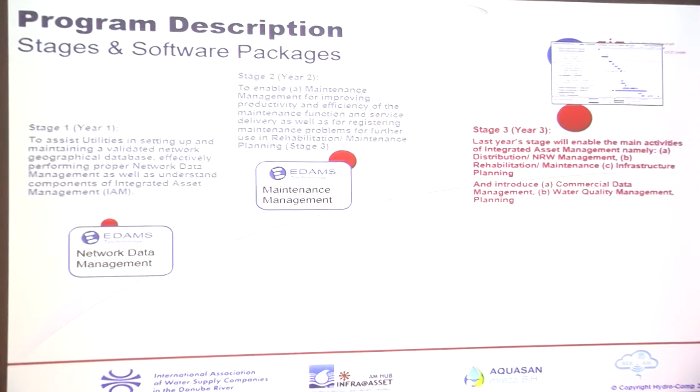Stage 3 is a combination of basically 3 activities: non-revenue management, distribution non-revenue management, rehabilitation maintenance, and infrastructure planning. Shortly, I will explain what these 3 things are.

Of course, each one of these items is supported by EDAMS modules. So there is a specific module addressing non-revenue water, and addressing asset management and distribution management.

What is distribution management? As you see in the slide, we want to ensure proper service delivery, to operate and control our pumping costs, and to localize and quantify as much as we can system losses.

Now, as you can see, there are preconditions. To get there, you need to have a computerized billing system, which everybody has. You need to have a good asset registry, and you need to have a distribution network reasonably zoned with bulk meters. So we're going back to zoning now.

I don't know which of you were in the advanced training. You remember we touched the subject of zoning. When we touched the subject of zoning, a lot of people didn't exactly follow what we were doing on the zoning side. We understand, the concept is not that simple. It's deceptively simple, it's not. There is confusion about zoning. Different people mean different things. People do DMA zones and they think they do zoning.

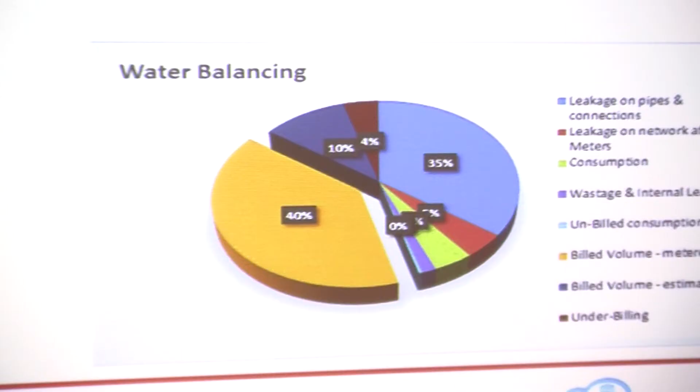They're not. DMA zoning is artificial zoning we create to control losses, but it's not our true zoning. Our true zoning, and how the system behaves, is controlled by pressures, by PRVs, by reservoirs. That doesn't mean it coincides with our DMA zoning. It might not, and that creates a lot of confusion.

Because you have consultants coming in and telling you, break the system, yes fine, put bulk meter here, put bulk meter there, put 20 bulk meters. In the meantime, they're destroying the network, they're destroying the pressures. And then one brings the other. They say, oh you know, there is no pressure here, or there's too much pressure here, put another PRV. So you start creating a very high complexity within the system because the whole process was wrong.

Because a simple concept, a theoretical simple concept, is not understood. So we have to go back to basics.

We have an excellent tool, the Zone Manager. Excellent tool. That tool, what it does, ignores what you have done. Ignores completely what you have done. It tries by itself, unsuccessfully sometimes, but it tries by itself to recreate your zoning. It says, I don't care what you've done, I don't care what you think, I'll tell you what your zoning is.

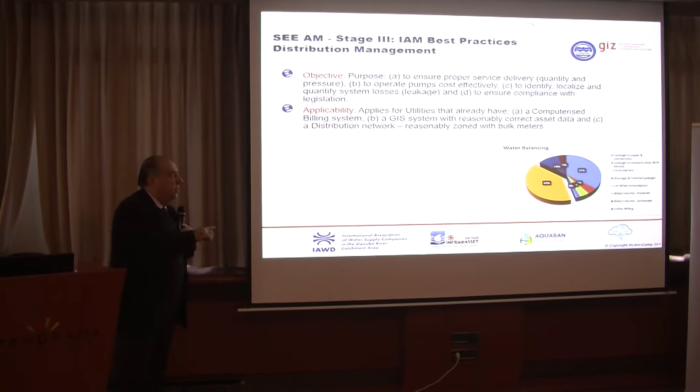And if your data are correct, it will recreate by itself your zoning, and that is your true zoning. Your true DMAs, your true pressure zones. We're going to come back to it. As I said, it sounds simple, it's not that simple. But from our understanding, it has everything to do with distribution management.

Okay, so what are we addressing here? We have a very nice infrastructure that we call non-revenue auditing and balancing. It's a separate subsystem with a specific purpose to manage DMAs. If we have built our asset registry properly, now we're putting in the infrastructure to actually capture and control our DMAs.

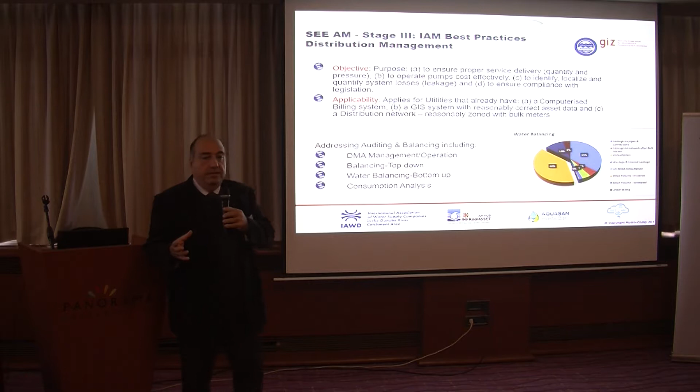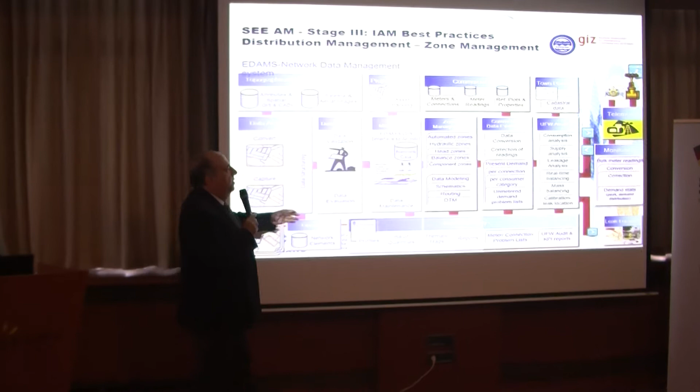But before we get there, as you can see, these are the modules that come with it. There is a separate module for zone management, for commercial data evaluation, and for unaccounted for water analysis. I will say a few things about commercial data evaluation because this is a more complicated thing.

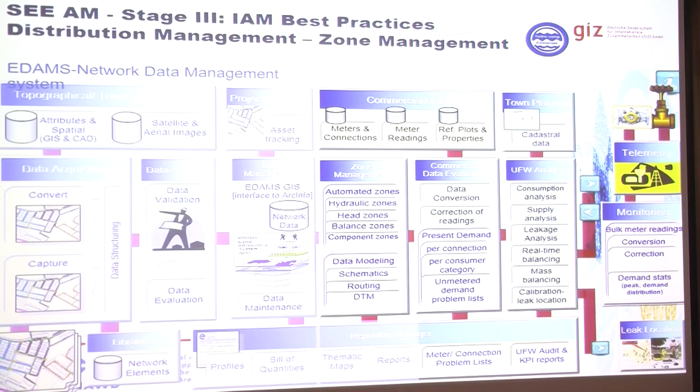But the unaccounted for analysis module on non-revenue is the heart of the system. Part of it is what we call supply analysis and zoning. Zoning, some of you have seen. Your whole system must be regenerated by the system. To start discussing distribution management, we must have the same picture in the system as the one you have on your walls. We must be able to see and understand the zoning the way you understand it. If we have a disagreement, there is a problem.

Either what is in the system is wrong and you are right, or you are wrong and the system is right. Can't be both.

So the starting point is the zoning. At the beginning of stage 3, we must all have the same understanding that these are your zones. If we don't, there is a problem.

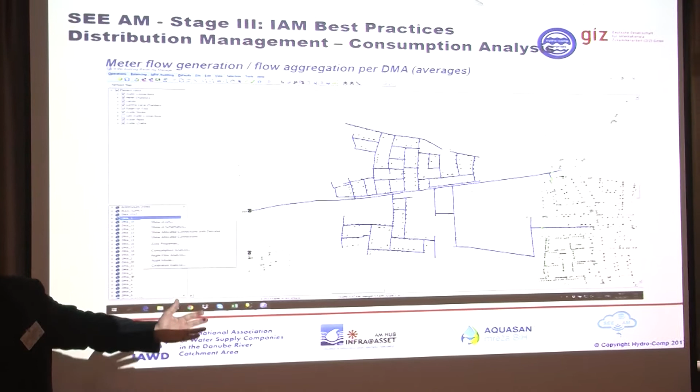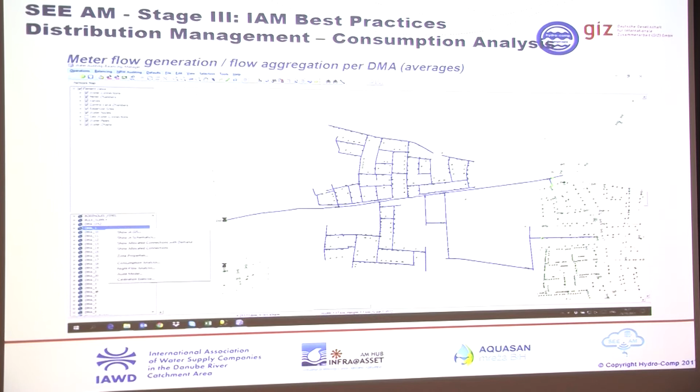Then we can relate, if we have the layer with your connections and the demands from your billing, we can relate for each of these DMA zones your connections, your consumers, to the actual network. The system will do that automatically, and it will aggregate the demands for the whole zone.

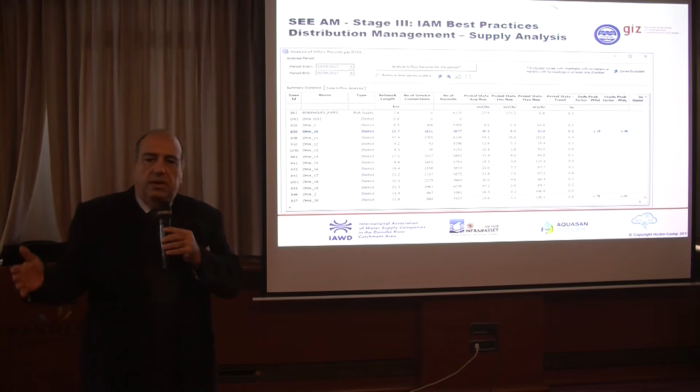But also will do something else. We'll do what we call supply analysis. Now for utilities that have a few bulk meters, that's not a big issue. If you have 2, 3 bulk meters, it's fine, you manage them.

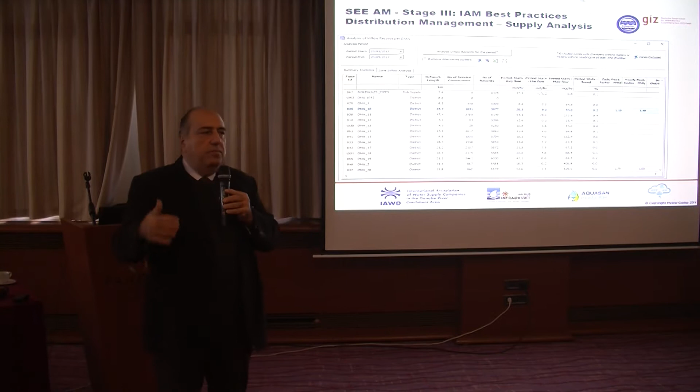But the problem is, with time, you start putting in the system more and more bulk meters. The 3 become 10, they become 15, become 20. And how do you manage these bulk meters? You say, I'll put telemetry. Excellent. So now you have 20 bulk meters and a very nice telemetry system.

And now you have all these signals and records coming from the telemetry with interruptions, with readings wrong, with wrong flows, with spikes. How do you use this data? How do you get from the telemetry readings to balance your DMA zone?

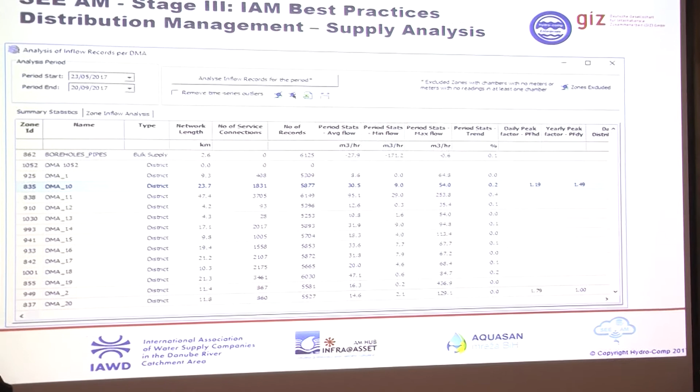That is the question addressed by a module called supply analysis. We also didn't know. We found out from real practice. We went again and again to utilities and they told us, look, we have this problem. We spend a lot of money putting in telemetry, but we're not getting what we want out of it. It's not what we're supposed to get.

How do we use that data? How do we relate this data from the telemetry to our DMA zones? So that infrastructure is in, and the process is called supply analysis.

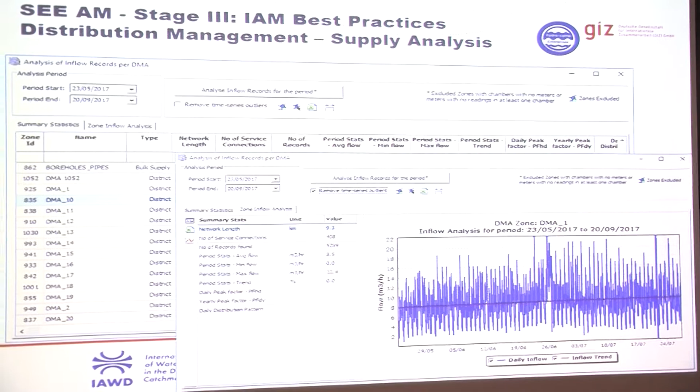So we bring the data in from the telemetry, we link to the telemetry. Since it was asked, we're going to explain how you're going to link in the telemetry. If you have a reasonably recent telemetry system that we can actually link to, and it's not ancient, working in a proprietary database, we should be able to link. It's easy, it's not so difficult. It should be a straight database.

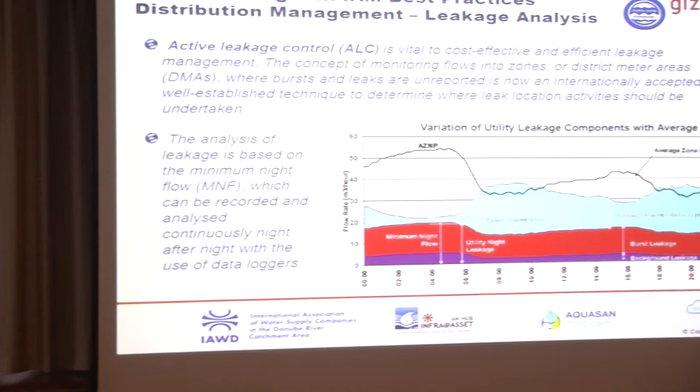So we bring in, we establish a link, and we start bringing in these telemetry records and filter them and analyze them. And what do we do? Before I go here, let me go up again. We link them to the bulk meters.

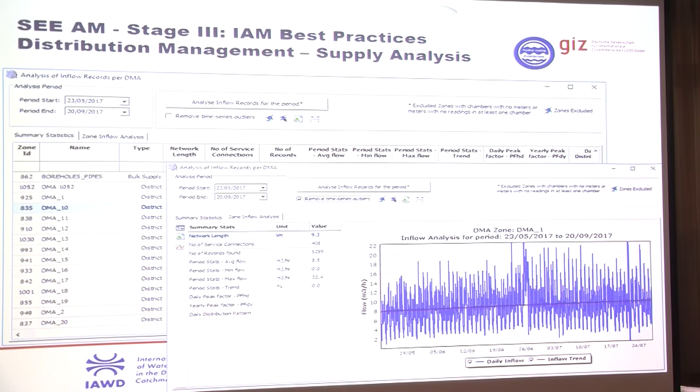So we take each telemetry record, we link them to the bulk meters, and we group them, because our zone manager knows which bulk meters belong to which zone. So it doesn't matter if you have 3 bulk meters in one DMA zone, the readings will be grouped automatically. That's called supply analysis, because where I want to end up is with one inflow going into the zone.

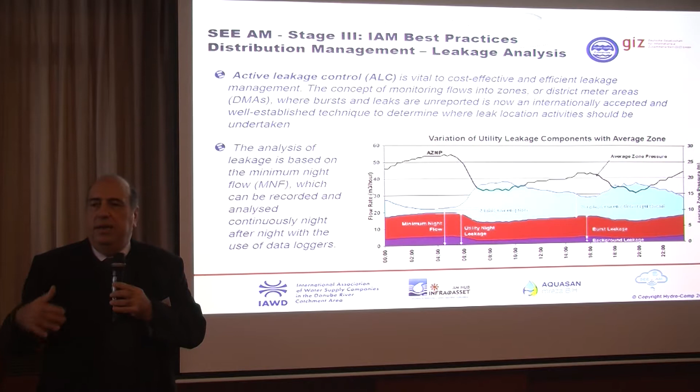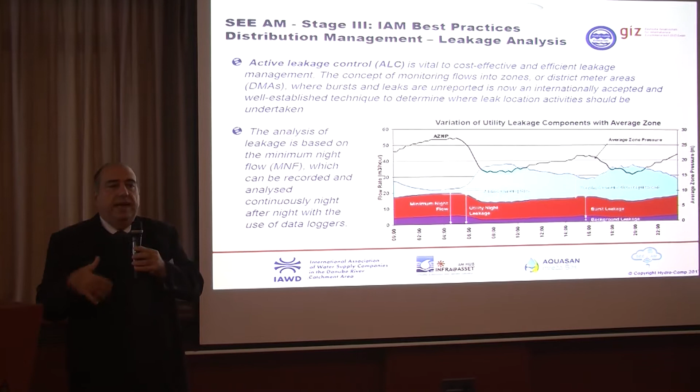What is our final objective? I'm not going to go into the theory now, but what is our final objective? Everything we do follows IWA practices. The system has fully incorporated IWA leakage control practices. IWA discusses and propagates active leakage control. We want to be able to react as soon as possible to leakage incidents and prioritize the zones and prioritize the problems.

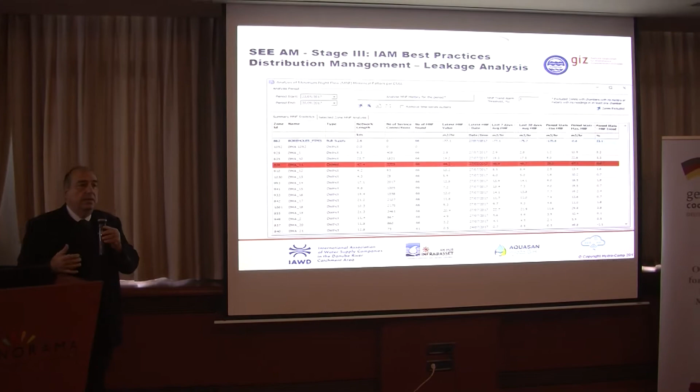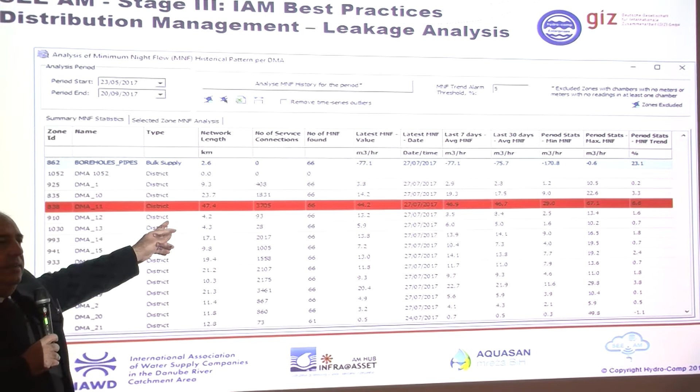So the system, once it's set up, automates the process. Here are your DMAs. It picks up and recreates the night flows. It generates the actual night flow for every zone and prioritizes them. You can even have alarms that tell you something is going wrong in DMA 11. So automatically, every day it can give you alarms showing which zones have problems.

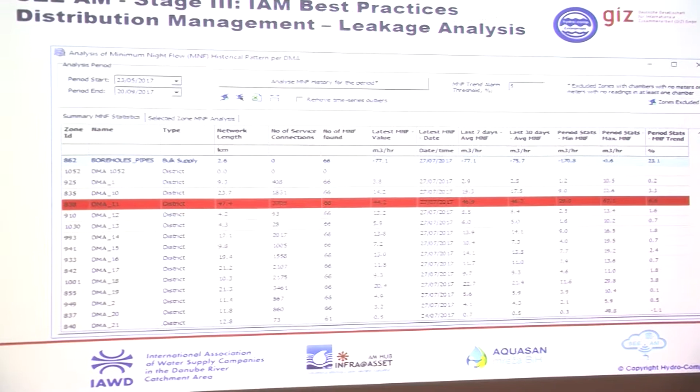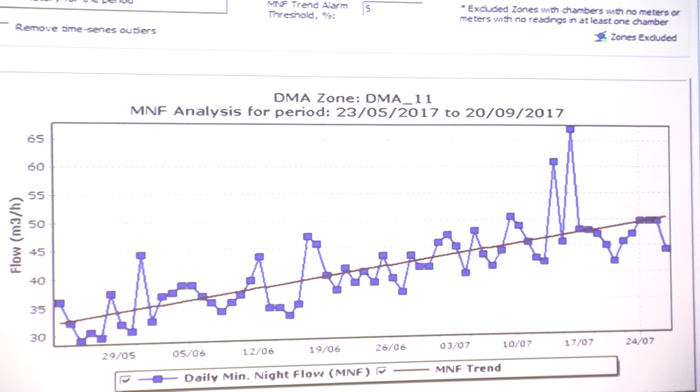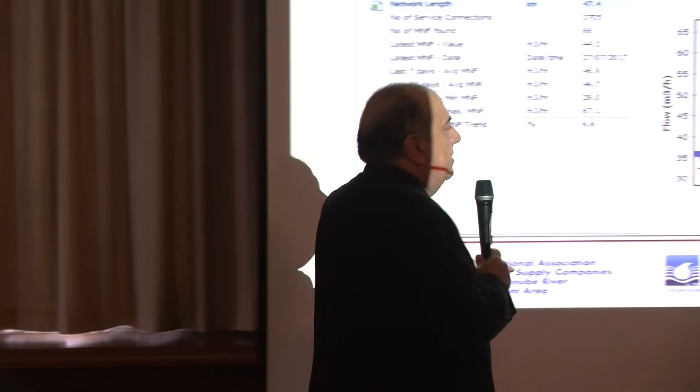And it does a few fancy things, like the graph you see here. This is the MNF trend. Whoever has worked with this kind of non-revenue water analysis, what do you want to see? You want to see the minimum night flow, and you want to see the trend of the minimum night flow. You want to see where it's going. If the minimum night flow is going up, you have a problem - that zone is problematic, you have a major leakage growing. So that kind of analysis the system does from the telemetry records and the supply analysis. That means active leakage control.

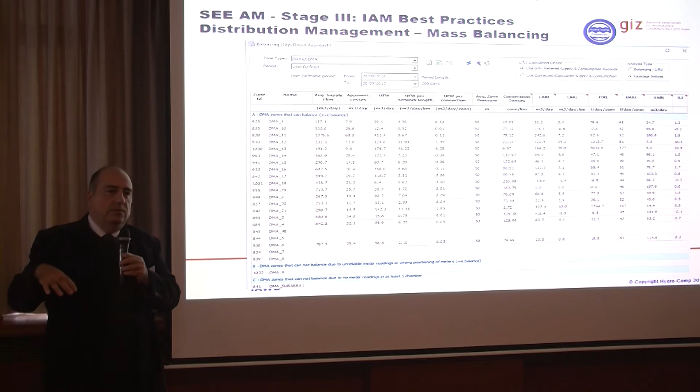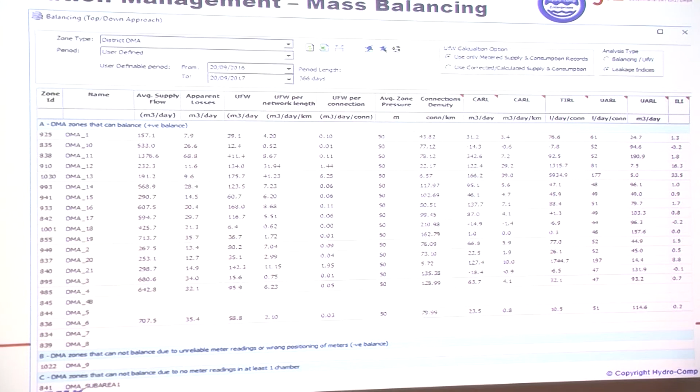But we can also follow the top-down approach. What I just showed you briefly is the bottom-up approach. Top-down means we balance supply with the billing records, with the grouping. Again, we can see for longer periods, a week, month, year, what the actual balancing is for the utility or for each zone, and we can produce different types of graphs for any kind of period.

This session is accompanied by training for understanding how we link to telemetry, how we analyze bulk metering, and how we do balancing top-down and bottom-up based on IWA practices. The full best practices of IWA is incorporated in the system. Everything we do doesn't negate any other activities for non-revenue water you're having, because we follow the same rules. If you already have activities for leakage control or unaccounted-for water, or other organizations supporting these activities, this fits excellent because we follow best practices.

So that closes the subject and the introduction to non-revenue water, because if we start discussing more, you'll stay here till tonight. This was a very small introduction. I'll move to the next issue, which is rehabilitation planning.

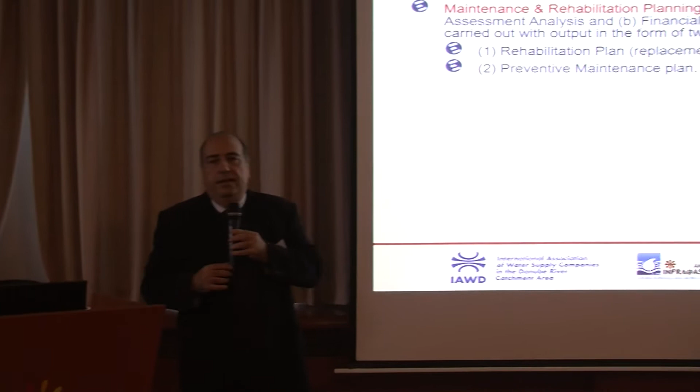Some people say rehabilitation planning is the heart of asset management. If you go into the books, into bibliography, this is true asset management. I got the question, when are we going to do real asset management? Well, this is real asset management. In terms of asset management practice, rehabilitation planning is the real asset management. If you Google it, that's what you're going to get. So in stage 3, we address rehabilitation planning, which is the real asset management, as people say.

That includes three parts: condition assessment, financial asset valuation, which was mentioned earlier, amortization as it was called, and risk assessment. Because at the heart of asset management is risk assessment. You have to address risk, risk of breakdown. What is the actual risk?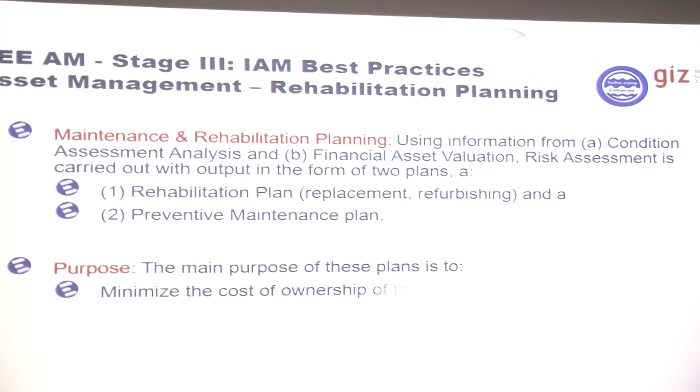And the purposes are pretty obvious. We want to minimize the cost of ownership, minimize the risk of failure, improve the level of service, and sustain the infrastructure in working condition.

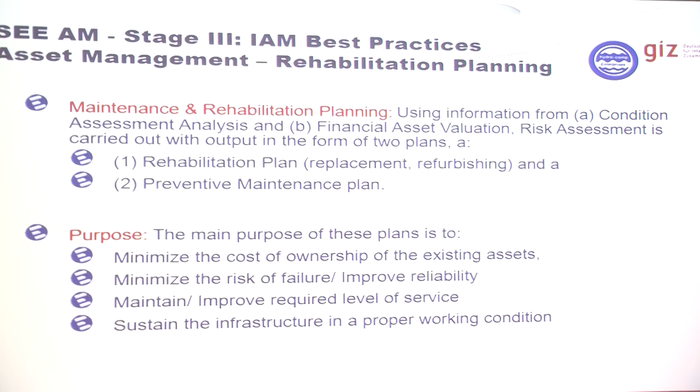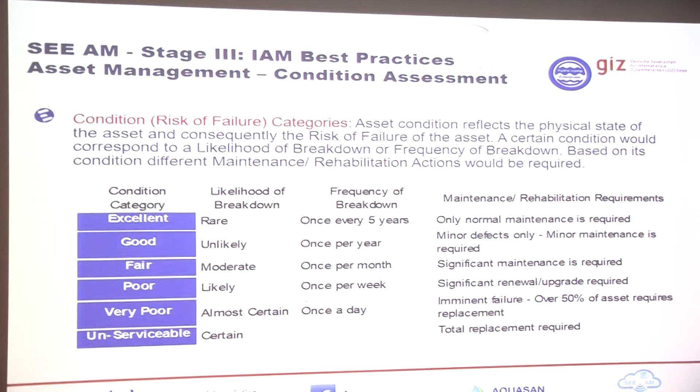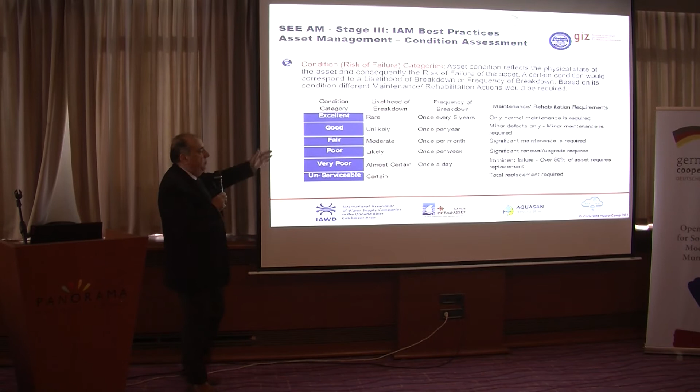There are a few concepts you'll see again and again appearing in the system. One concept is the condition categories, part of the best practices in the system. You will see it this year from the maintenance. When a foreman goes out and inspects whatever, he'll be forced to categorize the asset according to these categories, not a comment there, whatever he feels like. He has to classify it in one of these. Each one relates to an actual meaning, but he has to classify the condition according to standard categories.

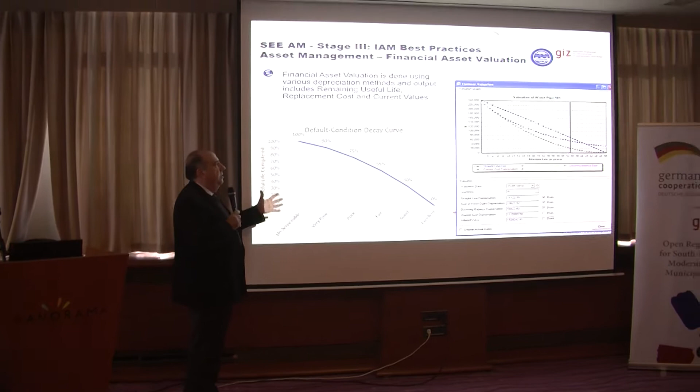And then there are other principles like the deterioration curves. Because if we know the condition of the asset, we can relate the condition of the asset to the percentage remaining useful life. It's like you have a car and you take it in for service and they tell you it's in bad condition. You expect it to have another 10 years, but it has another 2 years. It's exactly the same principle. So you relate percentage useful life to the actual condition of the asset.

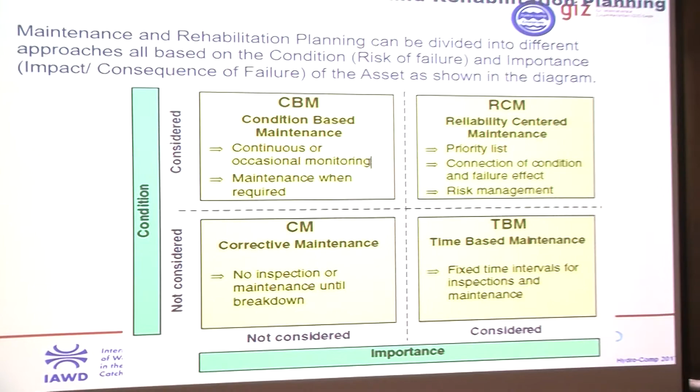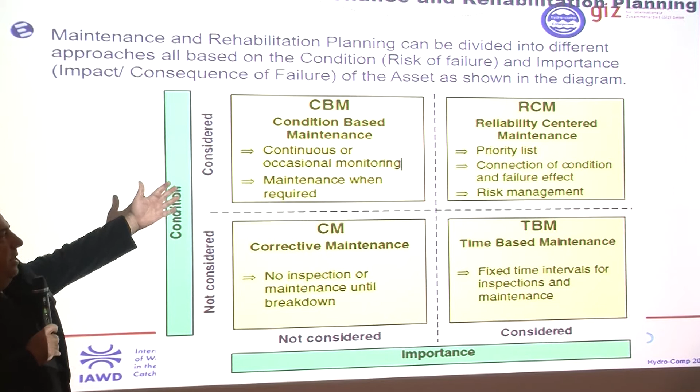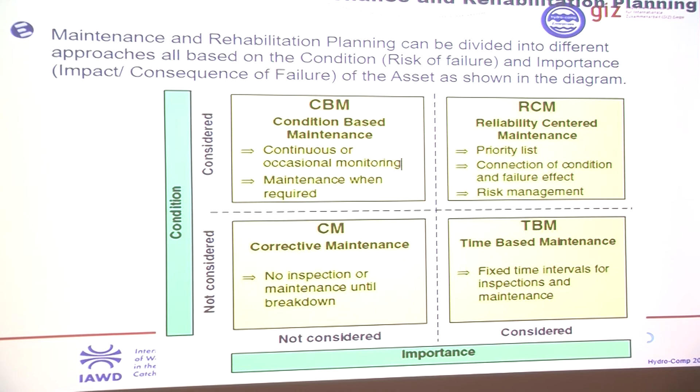And where we want to move it is to understand this kind of matrix, because this matrix will determine the kind of maintenance we're going to make. Where we want to move the utility, at least for the important assets and for those whose condition we know, is to do reliability centered maintenance. So we want the utility to define and have priority lists, and classify their assets in terms of risk assessment and priorities, to be able to schedule their actual maintenance.

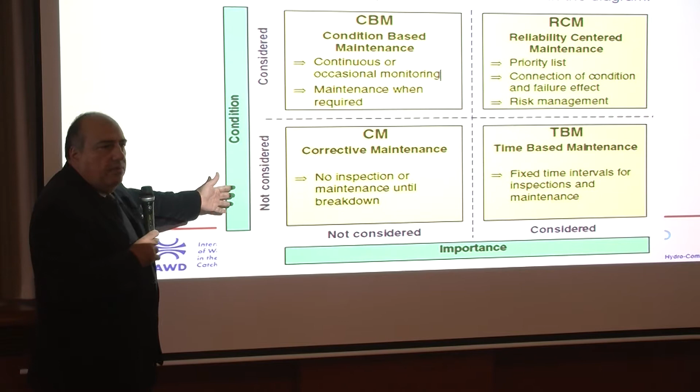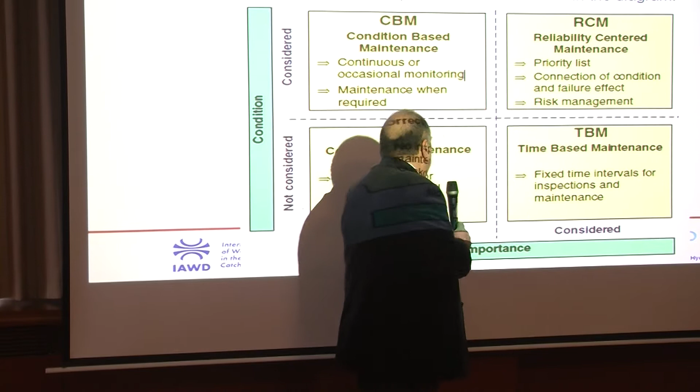So just quickly to explain this matrix. If an asset is not important and we don't know the condition, then we do nothing, we just let it break down, and when it breaks we fix it or throw it away. If an asset is important but we don't know its condition, like a car, then we normally do time-based maintenance. So we say every 5,000 kilometers, you must bring it in for service.

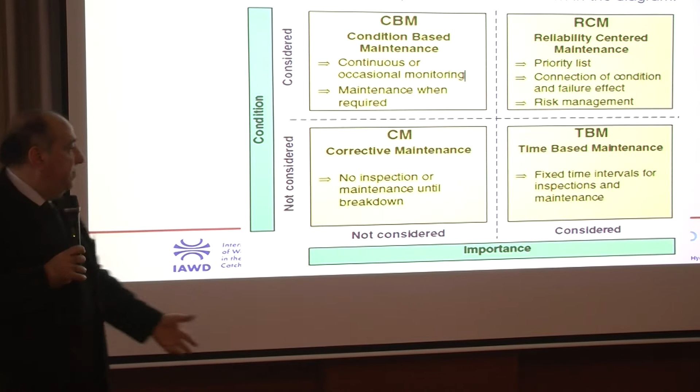That's time-based maintenance. If an asset is not important, but we know its condition, then we do condition-based maintenance. You have a pump. It's not important, but we know its condition. You know it's going to break.

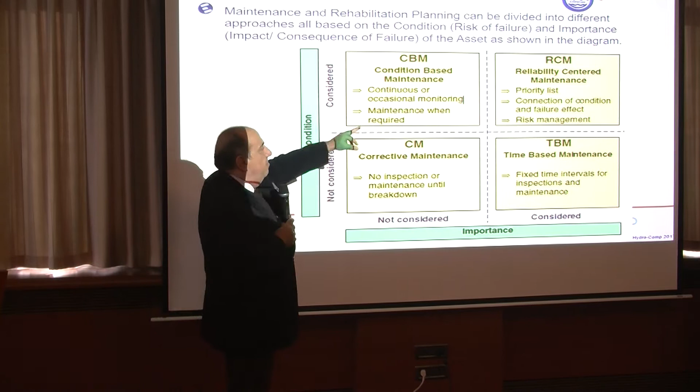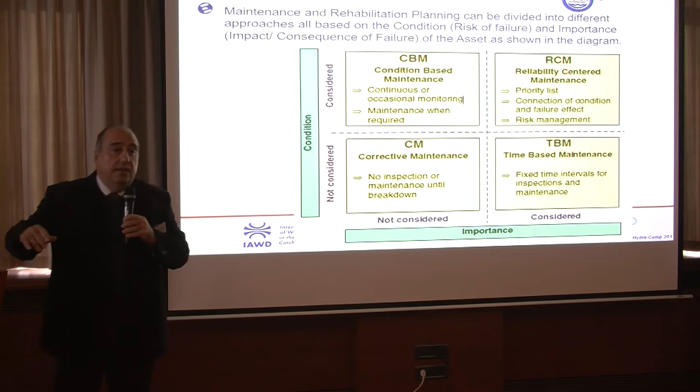So, based on its condition, you go and fix it. But the main block is the last one. Because if an asset is important, and we know its condition, then we must put it on a priority list, because it's an important asset. That must go for rehabilitation and must be prioritized according to the risk of breaking down. That's the logic we're building from next year.

How do we actually prioritize maintenance? That's called rehabilitation planning, and that is a big issue in asset management because it affects budgets. That's your budget for rehabilitation. That's what you're negotiating with the municipalities. That's what you're going and asking money for. How are you going to convince them?

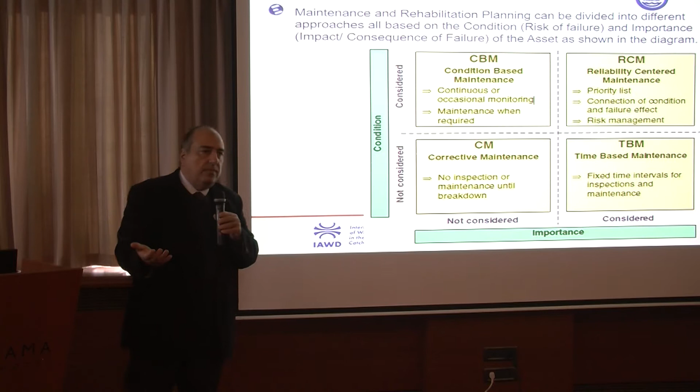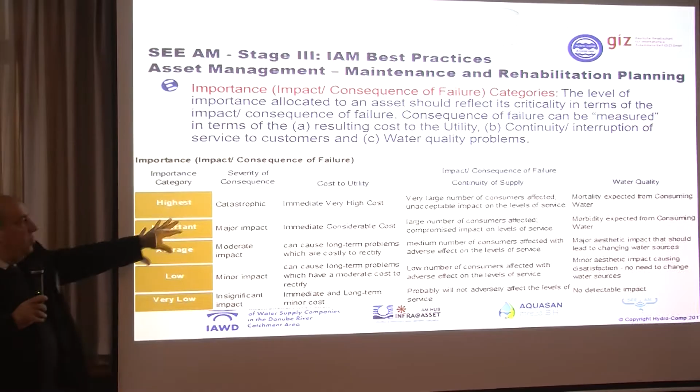You need to be able to assess risk. And then comes the concept of importance. Importance means, what's the consequence of failure of this asset? How important is this pump station for you? That's the importance. And we assess importance in terms of 3 impacts.

How much is it going to cost the utility if it breaks down? What does it mean in terms of continuity of supply? What will happen if this pipeline breaks down? How long will the whole town be left without water? And water quality - if there is pollution, or if that thing breaks down and creates pollution, a chlorinator or whatever, what does it mean to us?

So you might have noticed, I got the question from a few gentlemen or ladies. They were actually asking me why, in every asset they open, there is a little box asking for the importance of the asset. That is why - because we want you to mark, and we want you to look at the importance of every single asset, particularly system components, particularly assets which are very, very important.

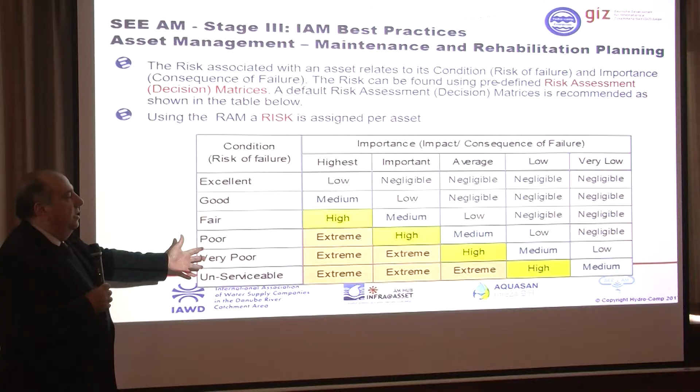Where we end up here is a matrix that relates the importance to the condition of the asset, and that's called risk assessment. So this is a decision matrix that relates the importance and the condition. So if it's extremely important and it's in poor condition, that's high priority. This is medium priority, this is lower, and this is no priority.

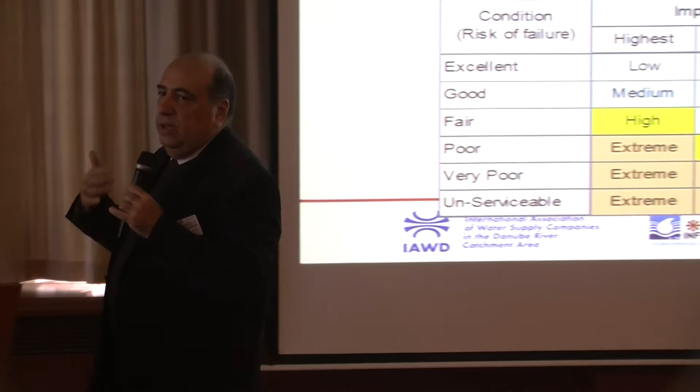That's the methodology we want to introduce, and we want to train you with a specific module called rehabilitation planning, and a specific procedural methodology for how you should do rehabilitation planning. How should you prioritize your assets for maintenance or upgrade?

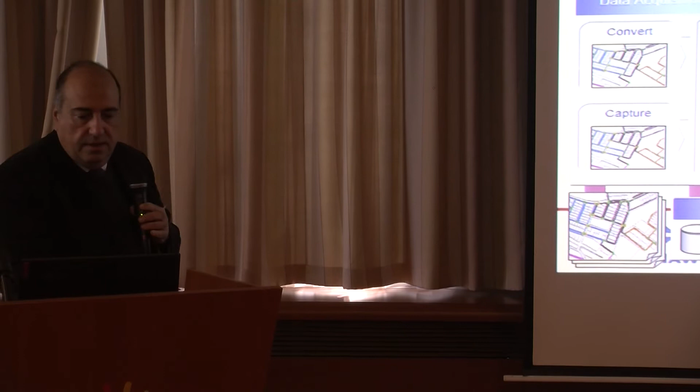So again, different activities, different modules. We're building it up: condition assessment methodology, financial evaluation, rehabilitation planning.

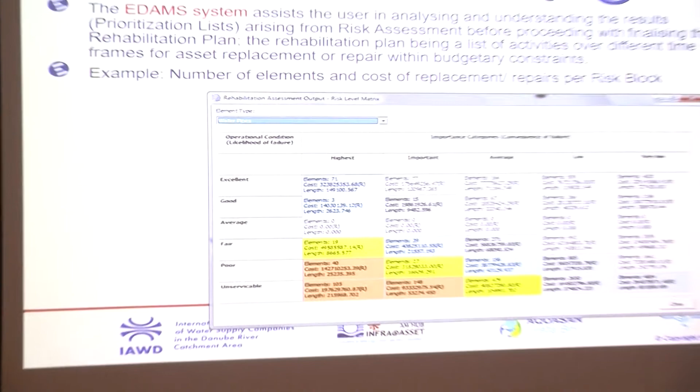I won't say more into that, but that's a typical output from the system - filling in the boxes with the different elements, the different assets that need to be prioritized, and what is going to be the cost for each one of them.

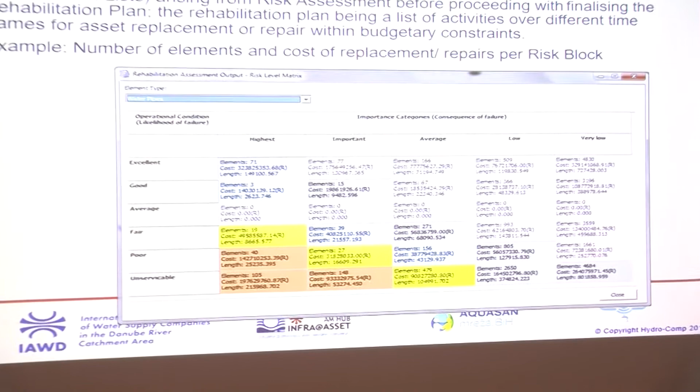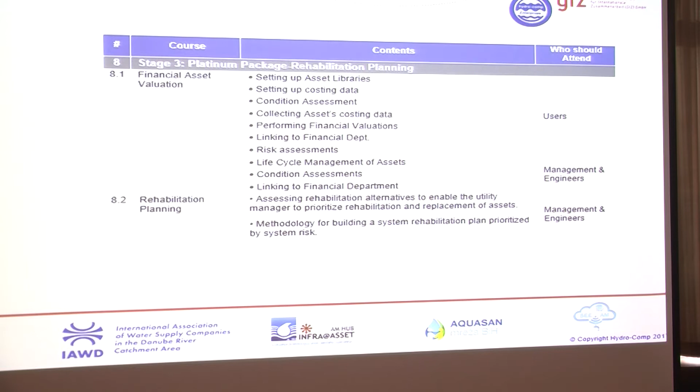Training, again, a training session specifically for rehabilitation planning, where we're going to address all this methodology. We're going to address risk assessment. We're going to address how you build a decision matrix. You're going to build decision templates yourselves. You're going to prioritize your assets yourselves. And this is the practice you will hopefully start to implement in your utilities thereafter.

And we complete the main elements with infrastructure planning. There's too many things we tried to put together, but unfortunately, all of them were asked in your questions, so there's nothing to be left out. Infrastructure planning involves a lot of activities - emergency plan, master plan. We're going to focus on one type of infrastructure planning: the quick win. This is the upgrading plan.

We want to answer the question: okay, I understand it would be nice to have a few millions to upgrade the whole system and fix it, but I don't. What do I do now? What can I do to fix the system with minimum cost? What can I do to optimize the performance of the system? So the main outputs of the upgrading plan are what you see here.

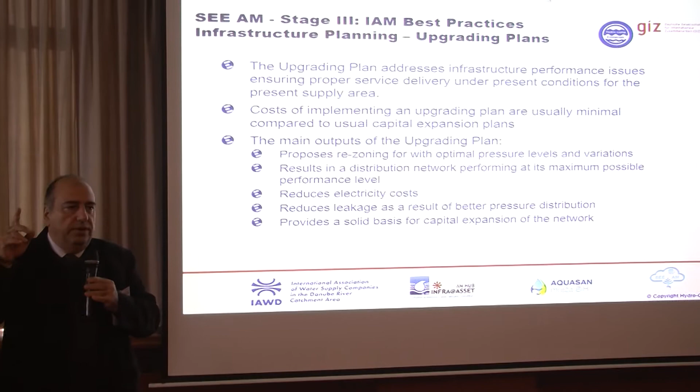To fix the system involves rezoning. You can't fix the system without rezoning it. That's a very, very important concept. You have to understand your existing zoning, you have to understand what goes wrong with your existing zoning, and then say, fine, now I'm going to rezone it. I'm going to change the way the system operates.

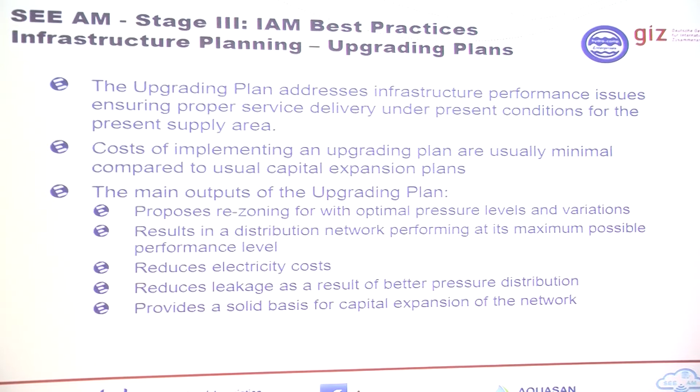If you do that, we'll have impact in everything - impact in leakage, impact in electricity, and of course it will be the correct basis if you ever want to do maintenance or master planning. So upgrading of the plan, upgrading of a network is an important exercise.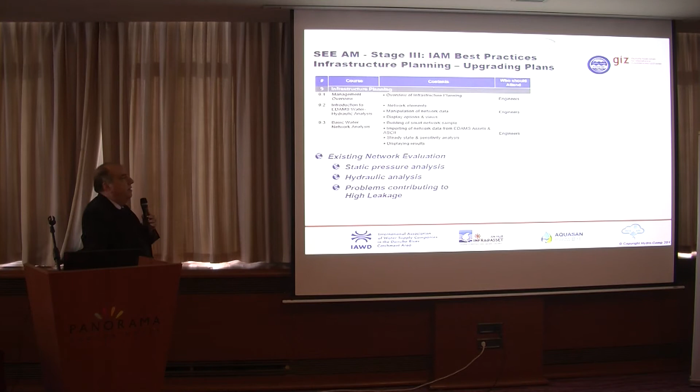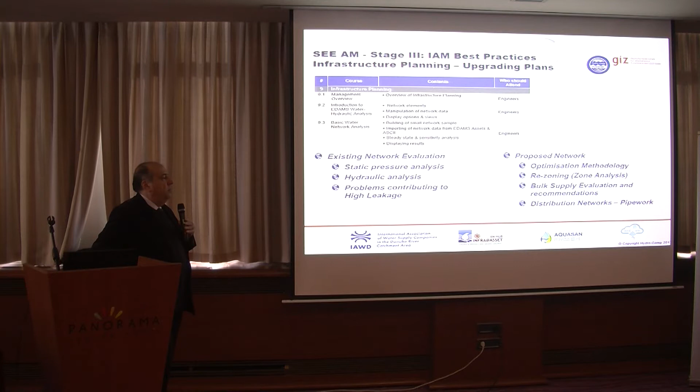Of course, we're not going to do the upgrading plans for all of you. We're going to teach you and give you examples of how it's done. But the methodology is the important part. And the training courses will include evaluating an existing network, and then a proposed network, what's the optimization methodology, how the rezoning should be done, and how the pipework should be reconnected.

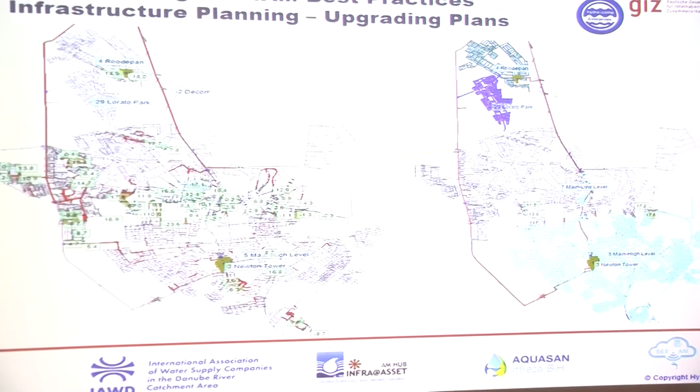This is an example of a network. The first trick we do in a network is we forget the zoning, and we say, all right, let's see what will happen in the system. The tool here is hydraulic analysis. This is the place for hydraulic analysis. To do what we're discussing now, you have to do hydraulic analysis.

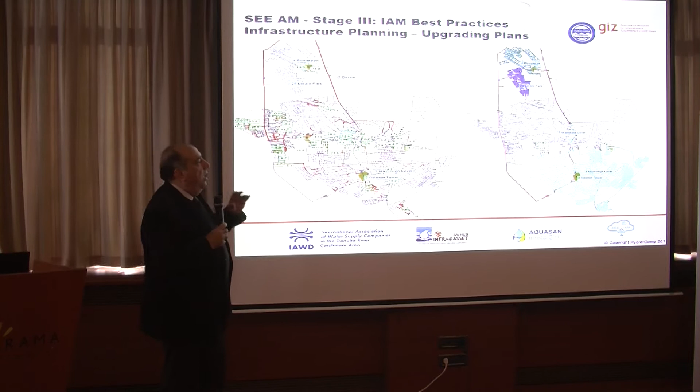So now you look at the network and you say, without zoning, what will happen? These are the pressures at peak conditions. This is what's happening. Let's look what I have now for zoning - what exactly happens to the system? Let's see why it works, why the pressures drop.

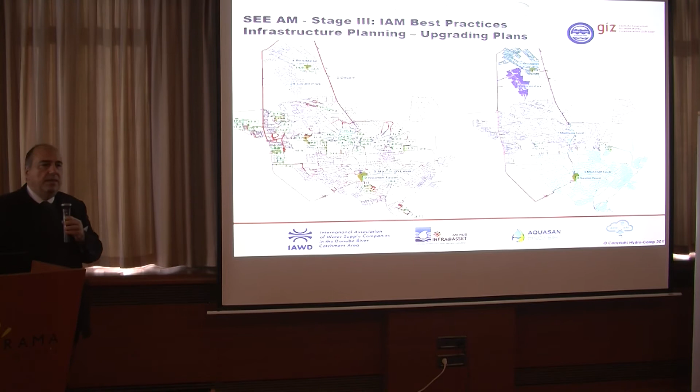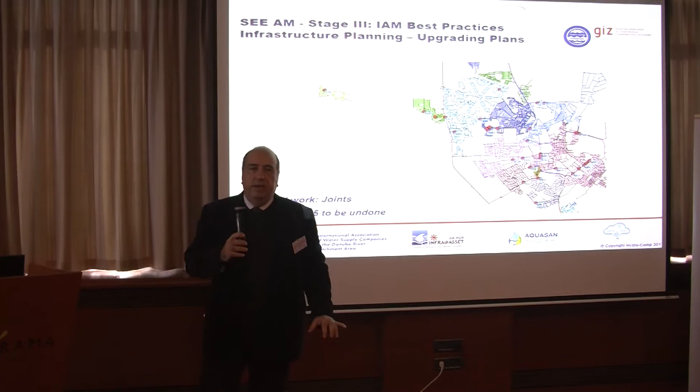And then you come up with a different rewiring and you say, look, we're going to break the system differently. We're going to change the way the system is wired, the way the system is connected. We're going to take these 10 PRVs out. We're going to reconnect these 10 pipes. We're going to do this, do that - small interventions in the actual system to normalize pressures and normalize flows because things got out of hand and the system doesn't work as it should work.

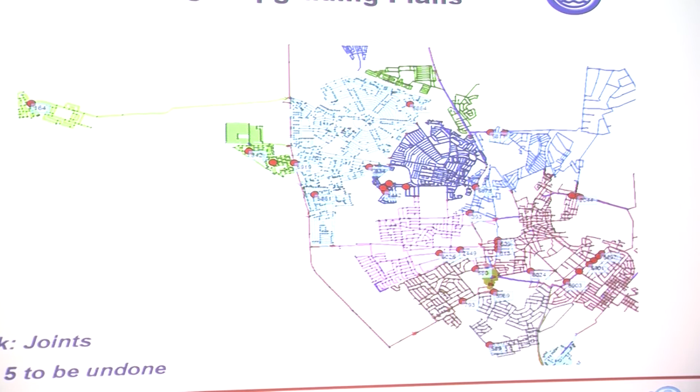That's what is upgrading plan. Now, why is it critical? It is critical, first of all - all of you understand why is it critical - but it's critical for another reason that is not that obvious.

People jump into non-revenue water and distribution management and try to find losses without optimizing the system first. To make it very simple, if you have a zone with very high pressures, first you have to sort out the pressures before you look for losses. You have to normalize pressures first before you address the problem of leakage.

So be very wary if you see consultants, if you see people trigger happy - I call them trigger happy people - who go out and start digging. There are a lot of trigger happy people. They love going out and destroying half the city, doing all sorts of things with very little result. Or result for 6 months, and 1-2 years later, the losses go up again.

That's why the losses problem is not that simple. It requires understanding first your zoning, and then how to rewire your zoning, how to change your zoning, before you address leakage. I say it again and again, and practice has shown that even major organizations, major funding organizations, simple principles like that are not understood.

And of course there will be a few more subjects, 2 more subjects, that are going to be mentioned and trained during the presentations, that for completeness of stage 3 we thought important to include. We understand that the 3 things I mentioned earlier are the most important, but these 2 are also important. The one is quality of water - how do you manage the quality of water?

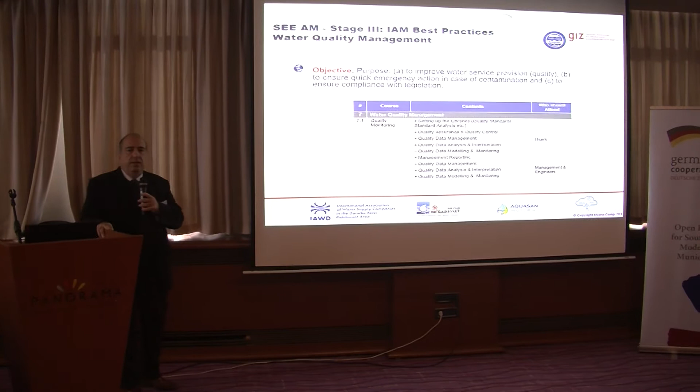Unfortunately or fortunately, this is a problem very often ignored by managers. They think quality is a problem of the laboratory. They undermine quality, and when there is a crisis and things go wrong, then you really have a problem and you see your face in the newspapers because there is a problem with quality of water. Quality can become, in certain utilities, a major problem.

So we're going to discuss quality of water, what you should do in terms of quality, in terms of managing different parameters, in terms of standards and so on. We're going to show you examples of how different utilities manage their sampling points and how they manage the records in the laboratories and so on. This is just an introduction to water quality practice. We're going to show you how it's being done in other places in Europe, what's the European standards for water quality, how water quality should be addressed.

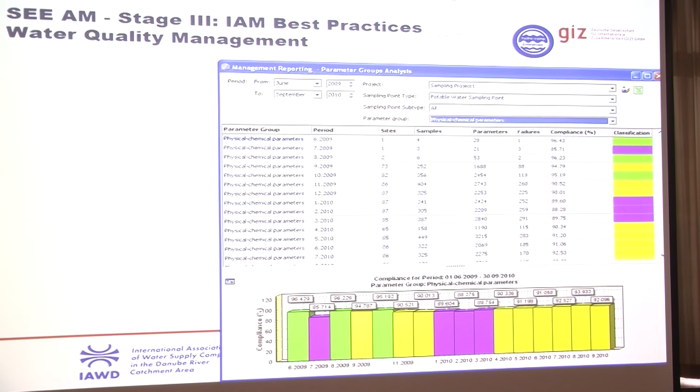And last but not least, we're going to present what is commercial data evaluation.

One thing we don't do, because I got this question, is link directly to your billing system. Not because we cannot, but because every billing system is different. This is a cloud operation, more or less standardized. It's easy to link to a telemetry database, but you have 70 different billing systems, each written by a different person with different tables. What we can do is bring in minimum records with consumption from your billing system that you provide us. But a live link with the billing system is something we can do further if you require. We can do it, it's not a problem, we do it all the time.

Together with that, we're doing something very important called commercial data evaluation. Since non-revenue water has two aspects: leakage and commercial losses. Whichever utility has losses more than 50%, I guarantee at least 40% of them are commercial losses. So by chasing leakage, you're chasing half the equation. The other half is your commercial losses, and you have to address them one way or the other.

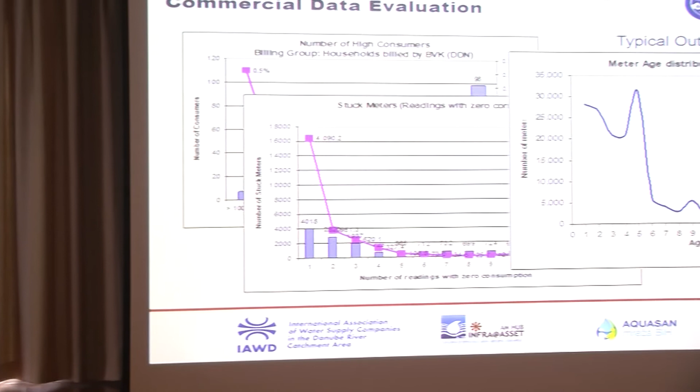So you need a whole different exercise just to address this part of the commercial losses. The different outputs come from commercial data analysis. Our effort is to sensitize you to the problem, to explain what needs to be done and what is required. As I explained, we can't link to every billing system. If you ask us individually, we can do it, but not as part of the SEEAM program, because it's very difficult given the different standards you have.

So, calendar. As we said, we meet here February 2019, all of us, for training. That will be the first training, towards the end of February. Then we come again in May. Then we come again in September. And then we do the fourth training course in November. The third year is very intensive - it has 4 training courses instead of 2, and they're quite intensive, because now we're capitalizing on everything we've done in stage 1 and stage 2.

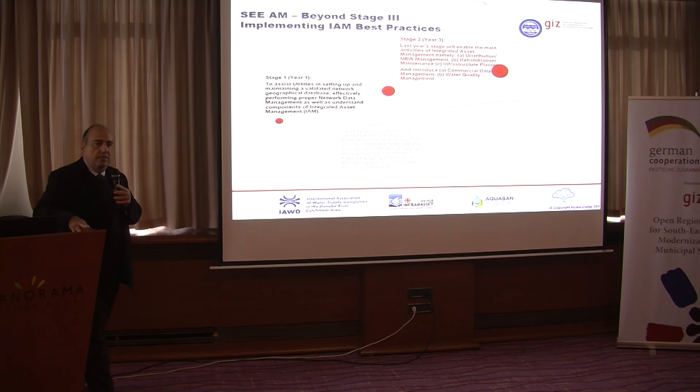And that in a nutshell concludes the whole program. I would like to say something, one last thing.

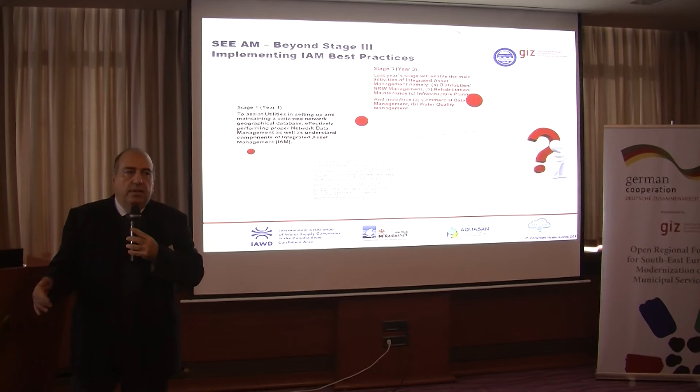We don't see that as the end of the story. This for us is not a 3-year project. It is for GIZ, it's not for us - might not be for GIZ either. But from our side, it's not a 3-year project. We see this as a long-term relation with yourselves. We see that we're going to be your partners for a very long time. That's what we want to achieve. We want you to trust us, to build that relation and trust over the next 3 years, to see that you're getting results out, to see what we can do, and actually use our systems, and use also the services of the hubs, because the hubs are the most important aspect of this equation, to support you and improve the whole infrastructure. Thank you.